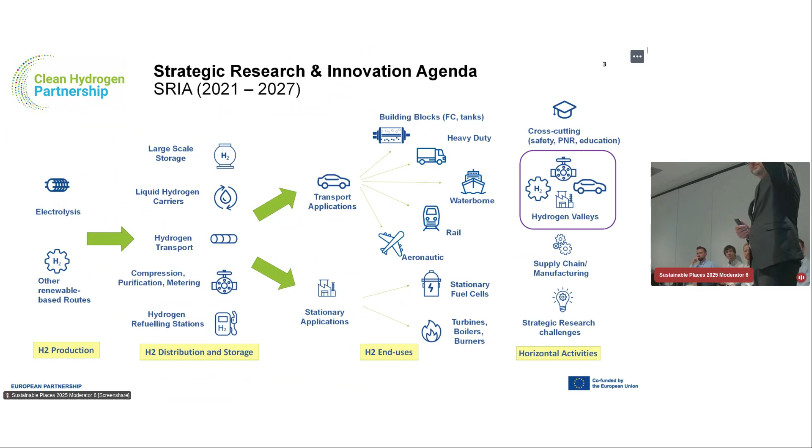What do we do? That's our mission. This is the third joint undertaking, and our purpose is to support the development and deployment of all the different components, pieces of the puzzle of the technology. So we're going from the production of hydrogen, the transport, storage of hydrogen, to all the different uses in transport or industry, and so on. On top of that, as you can see, recently we have added this additional box, which is the Hydrogen Valley, which was not something we were quite familiar with before.

So how did we get there? Well, it's the issue of the valley. It's something we've been working on for quite a while, since 2016 - we're talking now about 9 years ago. So as you can imagine, back in those days, the technology was still immature.

It was very expensive. The performance was not great. So the real life applications were somewhat limited. So a lot of our job working with the regions was about explaining to people how they could feature this technology into their local decarbonization plans. So it was a lot of explaining, working on early business cases, seeing the TCO,

how the technology could deliver. Time goes on, technology progressing, we start to see also some industrialization in Europe, and the Commission, the European Union, start to take notice of our technology. So this is not something for tomorrow anymore. This is something that can be featured in the European Union decarbonization plans and ambitions. So in 2020, you see we have the European Hydrogen Strategy.

Then in 2022, there was the REPowerEU communication. Probably heard about that one. This was about, when Russia invaded Ukraine, we realized that we are pretty much exposed when it comes to energy security. So there was an overhaul of our ambition. And as part of that, we also received 200 million as the joint undertaking, which are dedicated to the support of hydrogen valleys. So 1 billion is for hydrogen technologies in general, 200 million is dedicated to hydrogen valleys alone.

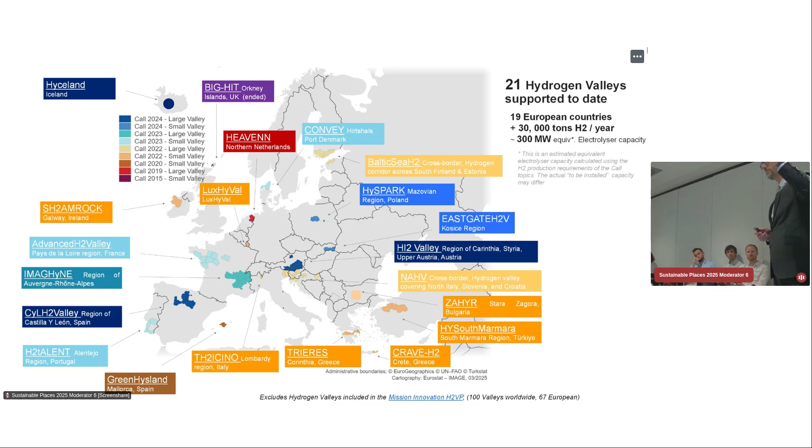The potential of all of these valleys, if you combine it, is 30,000 tons of hydrogen produced per year and around 300 megawatt of electrolyzer capacity deployed. And on top of that, there are tens of vehicles and HRS. Of course, I'm talking about potential. These are the grant agreements that we have signed. It's a relatively young portfolio of projects. We're still far from those numbers, right? But that's the ambition, that's where we are aiming at, and there's no reason to believe that we can't complete that or get very close to it.

Okay, so I'm getting the wrong button, there we go.

But getting there is not going to be easy, and we will hear probably about it even later. Again, it's a young portfolio, so even as a joint undertaking, we are still trying to get our head around it. But there are some common challenges that are starting to emerge that are clear. So the business case, it's not easy, especially now that when it comes to hydrogen, the industry is in a tough spot. And we are seeing increased cost of hydrogen, higher TCO, difficult for business models.

And also when it comes to mobility, for example, there is a lack of variety of vehicles that can be deployed. So sometimes we see there is a demand from a valley, but then there is not an industrial answer to that. That's linked to the second point. So there is a certain fragility of the suppliers, the end-use solutions. Of course, technical challenges. These are first of a kind type of projects.

So it's not anymore about deploying one piece of the puzzle, the electrolyzer, the HRS, the buses, and see how they work. This is about putting them all together. This is making them work in sync, right? And then there is also the issue of additional funds. We are publishing calls for small valleys, 9 million, and 20 million for the large ones. Well, it's a lot of money, but still it's peanuts.

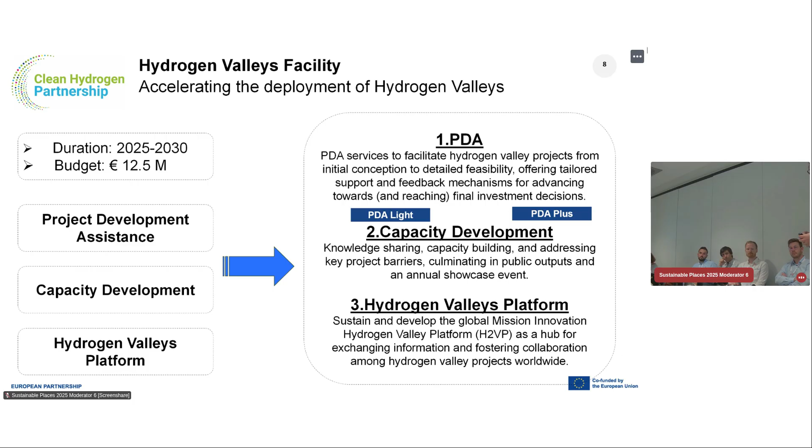Voila. And sorry, that was very fast, but 10 minutes. And it's just an overview of what we are doing there. All right? Thank you so much.

So thank you very much for this overview. It's really important to talk about the challenges, but it's even more important to talk about the progress made. That's why we are here today, to know more about these interesting projects. If we have very quick questions for Pietro, maybe we can ask now or we continue with the other presentations.

Okay, so we will start now with Guilherme Gaspar. So please welcome our speaker who will present H2tALENT, Alentejo Green Hydrogen Valley. Can I do the rest? It's yours.

So, good afternoon, everybody. I'm Guilherme Gaspar, lead researcher at Lab in Portugal. We are here representing a consortium of 29 partners in the H2tALENT project. It's a large consortium, which is always not easy to handle, but we have know-how there that will be very important for us to make it work.

So, a brief summary of this. The idea is to implement infrastructure in the Alentejo region. Alentejo is a very large region in the southern area of Portugal, where there is already a strong penetration of hydrogen, especially in the petrochemical industry. So the idea is that we take advantage of what exists already and try to build on top of that.

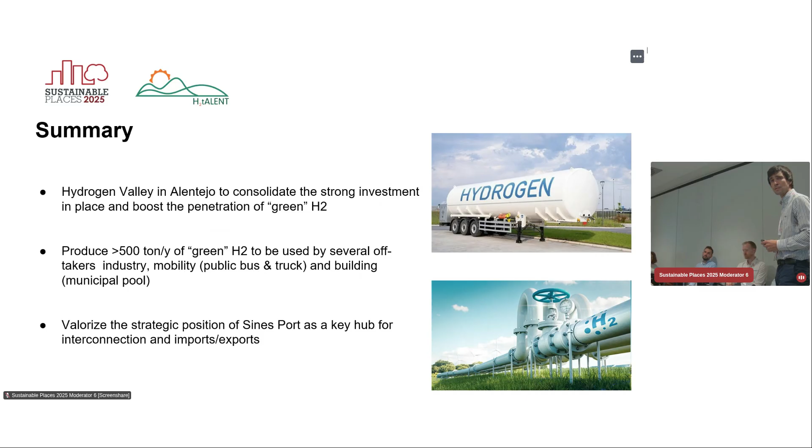It's a large consortium. We have Portugal, Spain, Luxembourg, Germany, UK, Brazil, and Morocco. So it spans not only across Europe, but also outside. So it's actually a very important asset by itself. We should be able to help others to develop, but we are also supporting our development on the Luxembourg Valley, present here. In the end, we are a consortium of 29 partners and 7 countries.

So this is basically the overview of the team. It spans from academia to industry and also municipalities, which are very important in this project as well. This valley is actually led by the University of Évora, which is also in the Alentejo region.

So this is basically the structure of the project. This is the map of continental Portugal. It's basically 4 locations. One in Sines, as I already mentioned, where you have the production. Then we have Évora and Alandroal as the end users, and we also have a third end user, which is actually more an energy community at the very south of Portugal. It's not in the Alentejo region, but when the project was submitted, we thought it could be a good asset to add because it's a very different asset for a valley. So it's basically a small valley, of course.

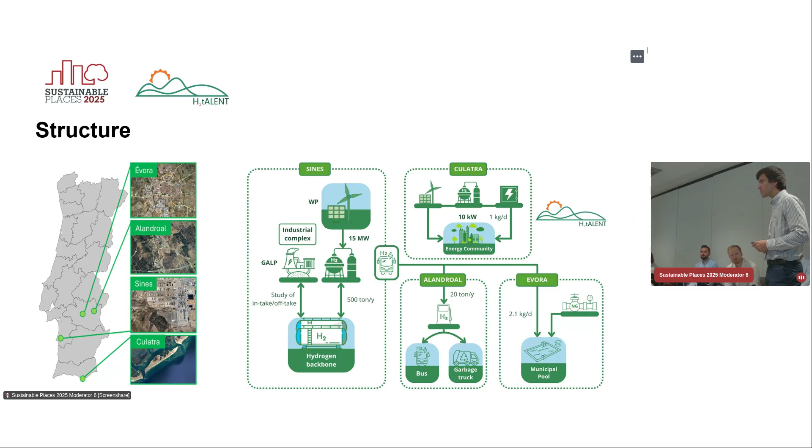On the right-hand side, we have Culatra island, working by itself with little interaction with the other assets. And then we have Alandroal with the mobility case study, where we have a bus and a garbage truck, which should be fed by 2 trailers from Sines, together with a municipality pool where we have a system for hot water to feed the municipality, especially in winter time. So this is basically our assets, which looks simple, but you will see in reality it's a bit more complicated than that.

So this is the structure of the project. The core of the project is based on work packages 3 and 4, where the assets should be developed. Work package 3 is the production and injection at the backbone in Sines, and work package 4 is more the end-use applications, from industry to buildings. Then you have all the other work packages supporting it, such as the creation of digital tools for management, upskilling and replication guidelines, and the other work packages dedicated to exploitation and project management.

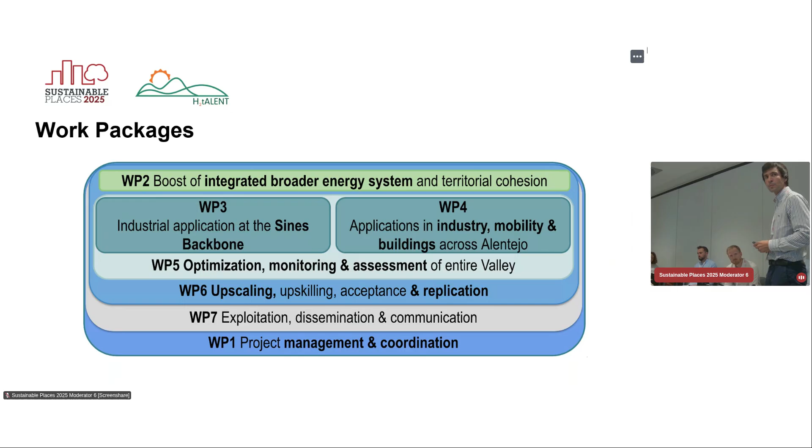In terms of progress, up to now we have delivered 11 deliverables, so about 30% already. 2 milestones achieved. I want to highlight milestone 2, which is the engineering design for the project. We have accomplished that. So we know what we want and we know what we are capable of, but we have some pending issues, which I will bring to you in the later slides. In terms of collaborations, we have robust communication among the partners. 29 partners is not easy to handle, but we are working on it.

So in terms of demonstrators, because I think that's what the core is about, we have the production of hydrogen in Sines as part of work package 3. It's an industrial area where we have land available, petrochemical and chemical industry, we have Galp, and we have Repsol Polymers there as well. So all of them need hydrogen.

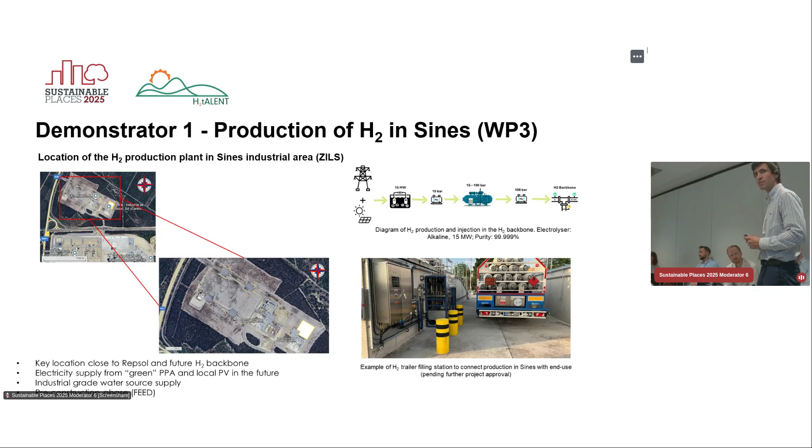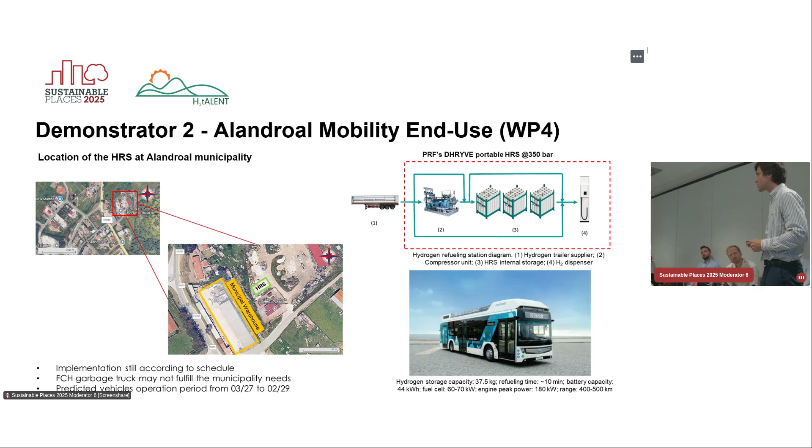In terms of mobility, we are targeting a fuel cell bus and a fuel cell waste collection truck. These will be the main assets. The other one will be a refueling station, built by PRF, a company dedicated to building these kinds of assets. They are partners in the project, so they will install it there. We already have an interesting place, close to a municipality warehouse, so this land belongs to the municipality, which is relatively easy to work with. We also have power supply at the scale we need, so this part is going relatively smoothly. We are starting the tender for the first bus to come.

In terms of the swimming pool at Évora, it's a bit trickier here, because at the beginning of the project we had a company called Fusion Fuel attempting to implement 1 megawatt at Évora, locally. The idea was also to develop a small-scale backbone there in Évora, which never happened. This means that the production of green hydrogen in Évora and the backbone never happened, and it won't happen in the next years.

So this means we have to sort it out in a different way. Together with the project officer, we tried something different: a local blending system to reach the target of 20% hydrogen in a blend with natural gas. The idea is that we get it from the local distributor, then redirect the pipeline towards this blending system with storage of hydrogen, and then bring it to the combustion system to work with the 20% hydrogen. But here there is a main concern: our local legislation doesn't cover hydrogen in public spaces.

What it does is provide a big umbrella to cover explosive and flammable gases, and that's it. This poses an issue when it comes to public areas, because you cannot control the number of people around. Most of them don't know there is hydrogen there, and we have a safety issue, which the municipality is also concerned about.

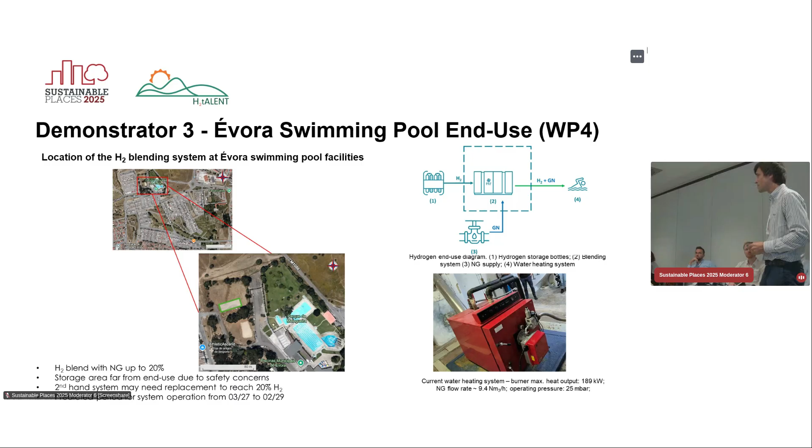So that's one of the other concerns we have there. I bring also the positive points, but also want to raise the challenges, because that's what's preventing this technology and this economy from growing.

Regarding Culatra Island, it was already an implemented energy community, so they have the stamp of energy community already. We are just adding a containerized system that produces hydrogen locally, and we can use a fuel cell there to power the local grid. It can be seen as an isolated grid, although there is connection to the national grid. So we are posing an extra system there that could bring an extra service to the local grid, and see what's the synergy between this hydrogen system and the local grid.

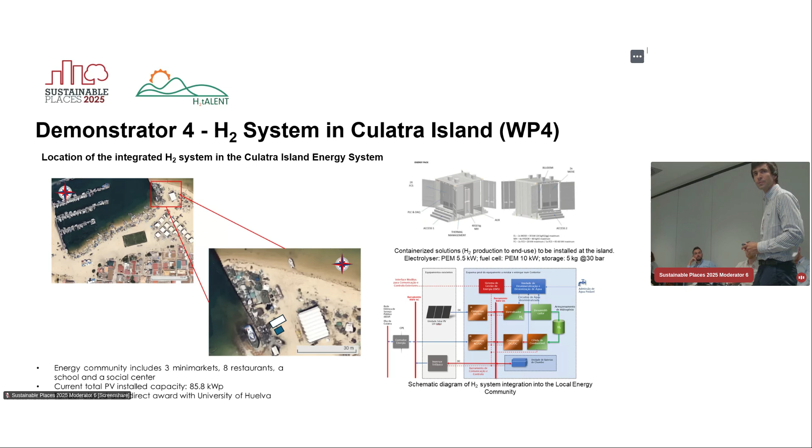They have a total PV capacity of about 86 kilowatt peak already, which is planned to extend. The tender is finished, so this one should go smooth and nice.

In terms of challenges and next steps, I already mentioned a few during my talk. The first one was the bankruptcy of Fusion Fuel, so they went bankrupt in the meanwhile. We had to replace them with a new producer in Sines, because it's not just about finding a hydrogen producer in Portugal, it has to be in the location where it was planned initially to make it work.

Fortunately, there was a company interested in this, Wind Power. They are responsible for the 15 megawatt implementation, but as I mentioned, we are pending on the national decision for this budget to come.

There were other projects attached to this H2 talent where the budget was from elsewhere, such as the backbone developed in Évora, which never happened. This led us to try a different solution, such as local blending of the system, which then poses extra issues regarding legislation. So it's not only one way, there is one issue after the other. On the way, we face several issues that we are kind of managing as we go.

As I said, local legislation does not cover hydrogen in public areas, so we have an issue there. And the wind power plant doesn't have an H2 trailer filler yet to link all the assets, so we have to look for complementary funding to cover this.

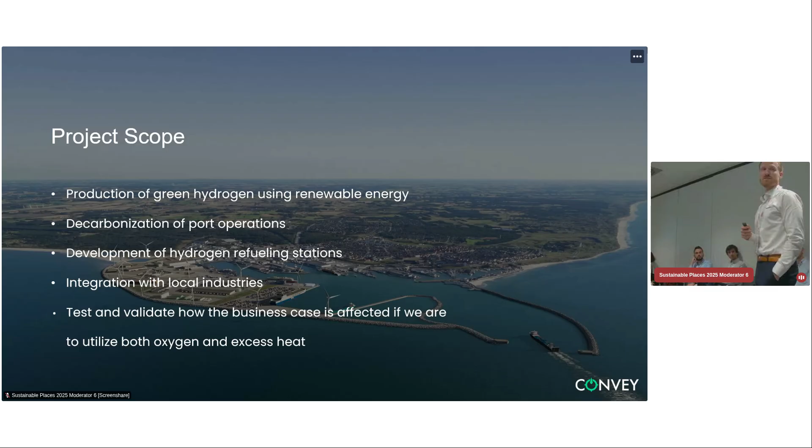Regarding the key milestones of the project and the timeline, we started back in March 2024, so we've been going on for a year and a half, just like H2 Talent. We are working on the system design at the moment. We've pushed this timeline forward a bit because we have some issues, not regarding the system design, but more regarding the business case, and also due to the way the application was written and the grant was permitted, which poses some problems for us now. But we are still confident we will secure the operation of the system, start construction by 2026, and secure the 2-year pilot period we are obliged for.

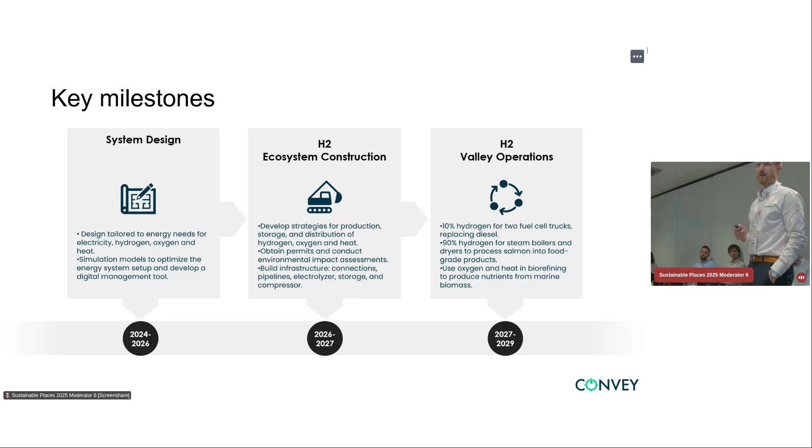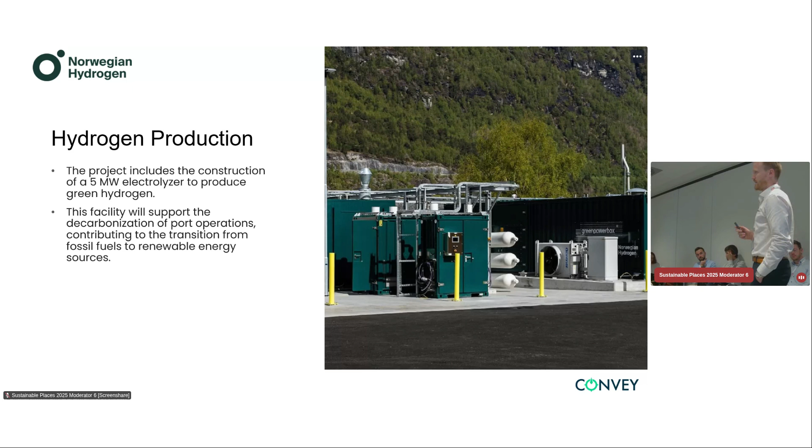Regarding the hydrogen production of the project, that is done by Norwegian Hydrogen. They're also the key partner in the project, and they're the one providing the external finance for the project. We're looking at a capacity around 5 to 6 megawatts for the electrolyzer, and we expect at least 500 tons of production per year.

Regarding off-takers, we have 2 different hubs. One of them is mobility. We have a joint consortium of Renewable Spedition, Transport Center, and Milan, where Renewable Spedition is a local logistics firm, so they will own and operate a few hydrogen fuel cell trucks. Milan will build and operate the refueling station at Transport Center, which is the reason we have this 3-part joint venture.

The oxygen from the production will go to Honest, a land-based aquaculture company. They are farming trout, so we'll have a direct pipeline from the electrolyzer up to this land-based fish farm, and they'll also be one of the off-takers of the excess heat. So a crucial two-part element of the project, and one of the tricky parts is developing different industries at the same time.

Biomega is the second off-taker of the hydrogen. They will have a direct pipeline from the electrolyzer into their burners, so we will substitute natural gas for hydrogen. They use it for steam production in their processing of fish cut-offs, making fish oils and proteins. So quite a versatile company, but they have a specialized system for this.

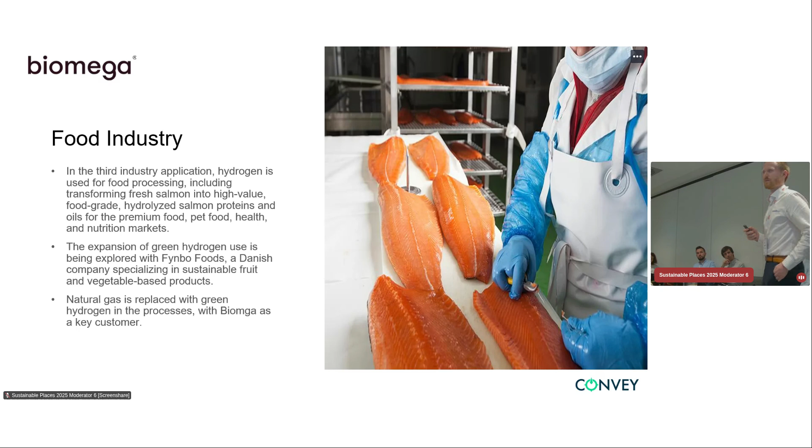Regarding the ecosystem, it's fairly simple, to be frank. Compared to the H2 Talent, we have a rather small ecosystem. We have a local energy supply at the port of Hirtshals, which is already established, so we'll connect to existing infrastructure. We're creating the energy management system, the data monitoring, and setting up the electrolyzer, and then securing the infrastructure needed for distributing the different products.

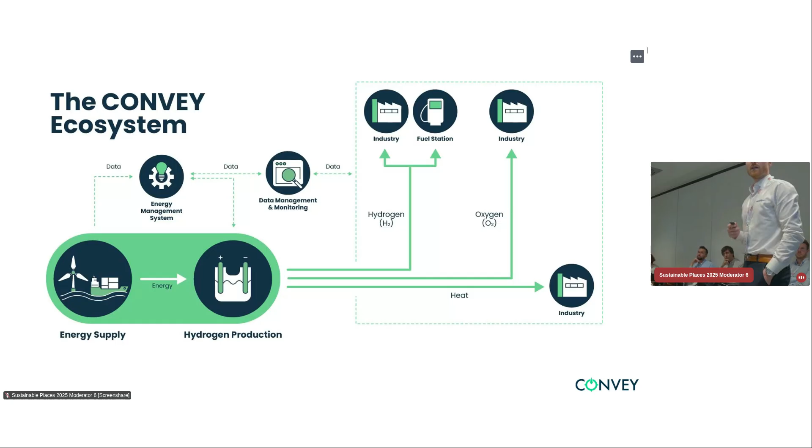This is what we sent in for the grant application. Here you can see the different partners - there'll be a better overview later on. It's a bit chaotic, I know, but it shows how the consortium works with renewable energy located at the port of Hirtshals, owned by the port of Hirtshals, going into the electrolyzer. Everything kind of goes on from there, and we utilize all byproducts from the electrolyzer - that's the key point of this project.

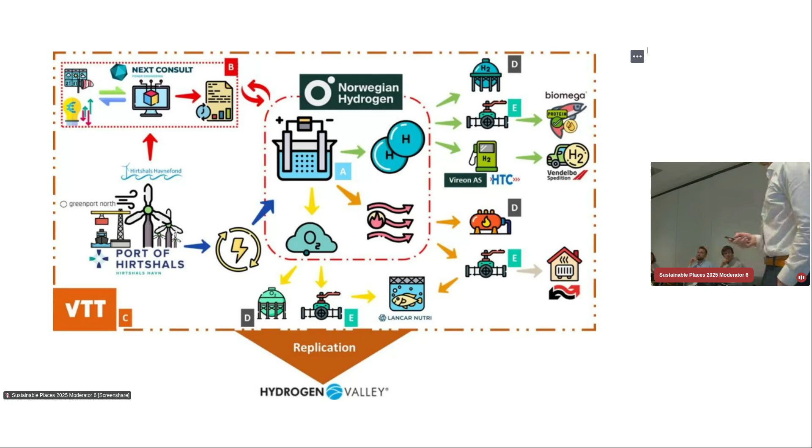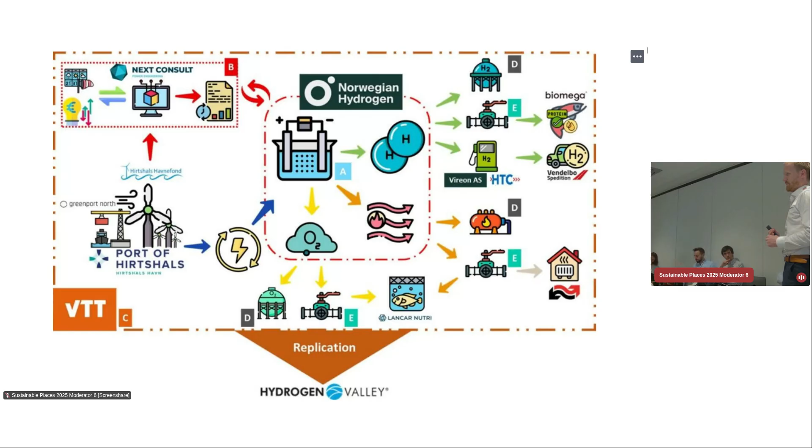Our role as Hydrogen Valley is kind of the dotted line around it all. We're in charge of the replication strategy, meaning we look over the shoulders of everyone in the consortium, assess what they're doing, evaluate it, and make guidelines for future hydrogen valleys, especially those based around ports. We're assessing which ports might be natural locations for hydrogen valleys in the future and which are not - we haven't seen any at the moment, but we're assessing that. We're also making a template for the checkpoints you assess when developing these hydrogen valleys, starting from the perspective of being a port.

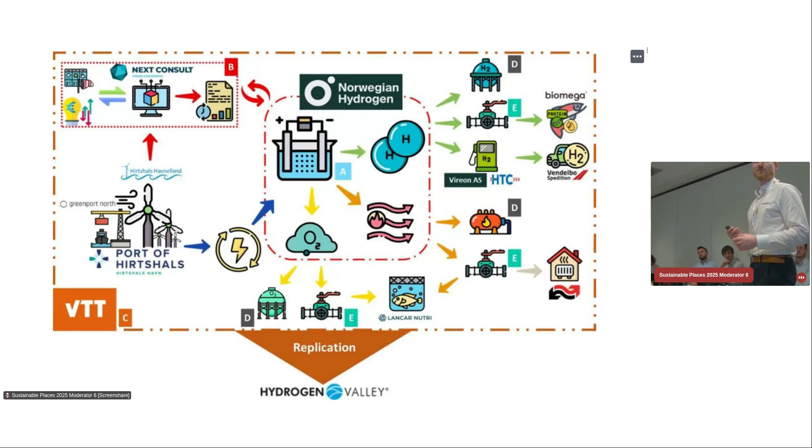So this is the actual valley, a picture of it. For reference, this is about 3 kilometers long from Hirtshals Transport Center down to the port. As you can see, currently there are 4 wind turbines located at the port of Hirtshals - you can't see the last one. We'll be connected to 2 of them by a direct line, but also connected to the grid. So the primary use of energy will come from the wind turbines, and we'll buy certificates from the grid if necessary.

Around 90% of the hydrogen will go to Biomega, we estimate, by pipeline. Of course we have a difference in price there, and that's one of the things we're assessing - the benefits, cost, and efficiency of transporting hydrogen by truck versus by pipeline. The pipeline will only go from the electrolyzer onto the local industry, Biomega. The rest will be stored in tube trailers at the production site and transported these 3 kilometers onto Hirtshals Transport Center, where it's repressured up to 900 bars for trucking.

I mentioned the oxygen pipeline as well - that will go to Onnest. Originally, when we made the application, they were to be located right here, and we thought it was a great idea to have a pipeline go there. Now they've moved location, and we're obliged to make this infrastructure, which poses some issues regarding the budget. As I mentioned, they're setting up a brand new land-based aquaculture right here - right now it's just a field. They're looking at a budget that's about 10 to 15 times bigger than our hydrogen valley, so for them they think it's peanuts, but we think it's an issue for the project. We're dealing with that.

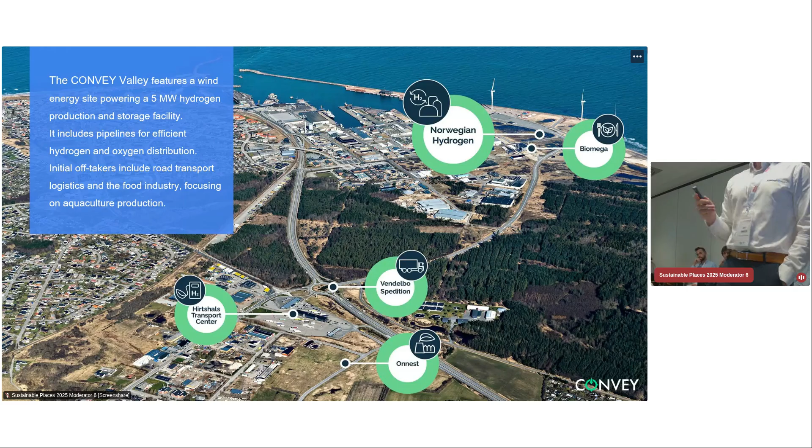Regarding the heat, it is to connect to the local district heating network. All of Hirtshals is connected to district heating, so that will be the offtake of the excess heat. In Denmark, district heating is very common in almost every city, so that is where we suppose all of the excess heat will go.

But as it is implemented already, the production of heating for the houses is already in place, and that poses a different kind of problem as we are to take over some contracts that are already in place. We'll see how that goes, but it's an issue we foresee in the future.

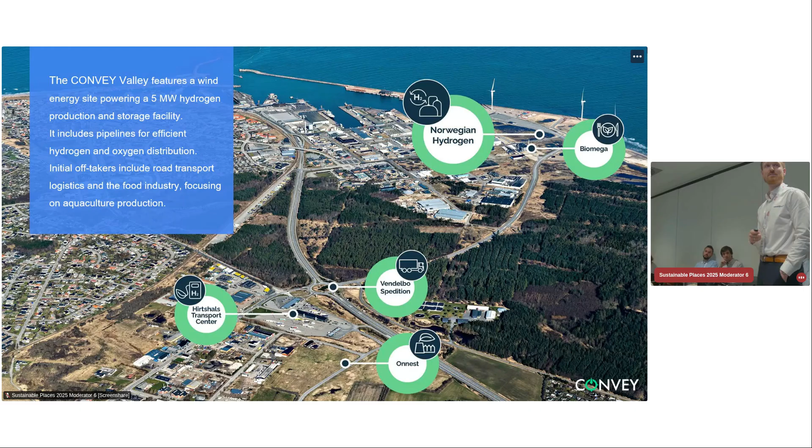One of our challenges is that we are obliged to deliver this oxygen. It narrows down the technology we can choose from regarding electrolyzers - one of the things we didn't think of when we made this application. So there are a number of things you might be able to look into, and some you'll have to go along with. But do your homework, prioritize your effort at the beginning of the project, even in the pre-project. The pre-studies are very, very valuable - prioritize those.

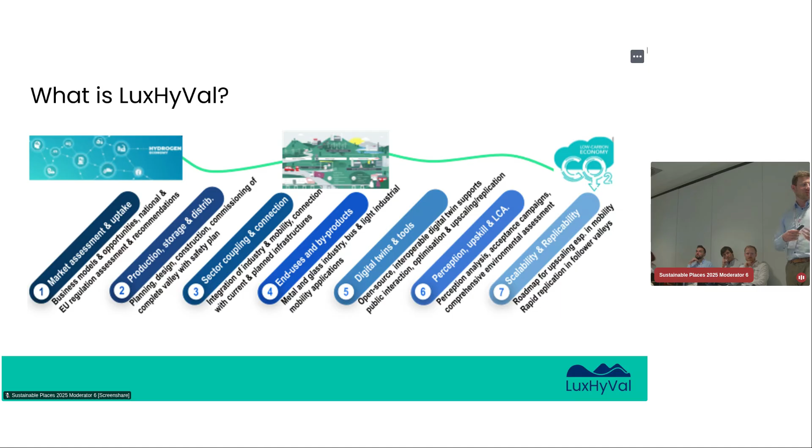For this project, replicability is a very strong point, to the extent that we have partners from Ukraine and the Czech Republic as part of the consortium from the beginning, to have them really deep in the project to transfer the knowledge out of the project to their respective projects in the future as soon and as smoothly as possible.

Like I said, we have 17 partners. Most of them are from Luxembourg, but we also have partners from Germany and France as the neighboring countries, spread across Europe. But the main partners naturally are from Luxembourg, and every partner has its own focus in terms of the work packages, as it should be in a project like this.

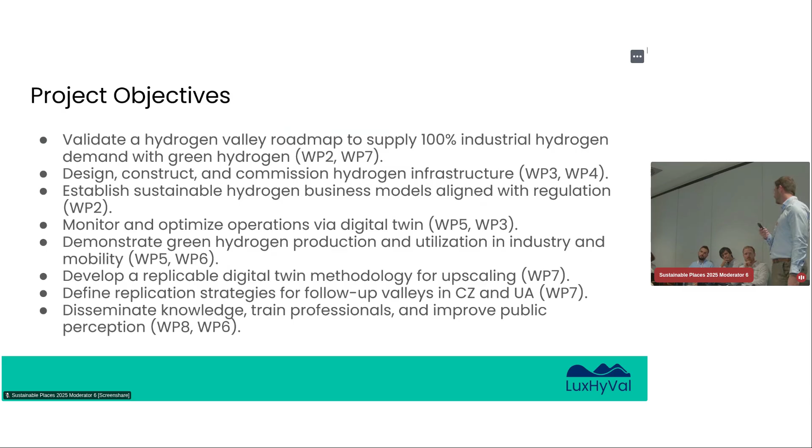And we have the different work packages. I don't need to go too much into detail on this because, like I said already multiple times, it is a very classical structure for a valley like this, with the one difference that we are really covering the whole value chain. Most valleys are already built up on something which is already present, or have partners which are already in the topic or in different parts of the topic, and we are really starting from zero in every work package we have here.

I don't know how many of you know Luxembourg, but Luxembourg is, I would say, the smallest real country in the European Union. It's not a microstate, it's a real country, even though it is very small, with just around 500,000 inhabitants. There is a hydrogen strategy already present, which aligns with the EU strategy. So this project is also in line with this, and that's also the reason why this project is funded on one side by the Clean Hydrogen Joint Undertaking, but also on a national level.

We are aiming for a production of 500 tons of hydrogen per year. In comparison with other projects, that's not that big, but it would be enough to satisfy 100% of the need for hydrogen which is present in Luxembourg right now. So it is really a significant amount, which will be split up so that more or less 2/3 goes to the industry, which is already consuming hydrogen, and 1/3 to mobility, which is a new sector. At least hydrogen mobility is a new sector which will develop inside of this project.

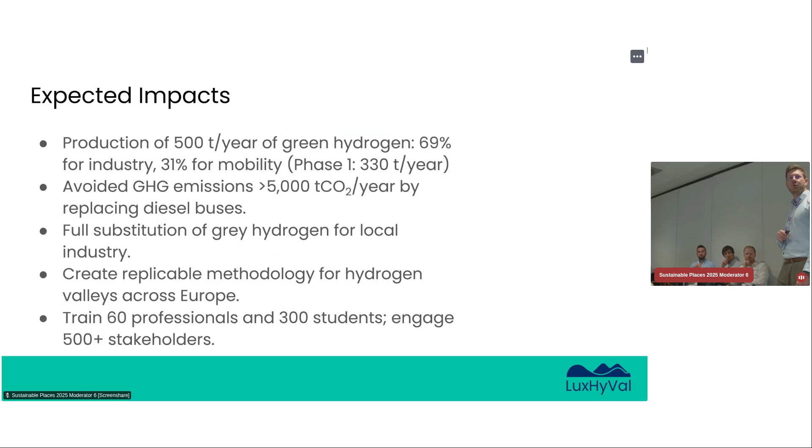Oh, it's the wrong direction again. Yes.

So we already started the project at the very end of 2023. It's already ongoing for more or less 2 years, and it has a split budget from the Hydrogen Joint Undertaking and national funding. But we are at a point where the project is not at a complete or full stop, but we are very much delayed by the situation that we don't have a final investment decision yet.

But there's a very good reason for this, and that's also what makes this valley probably a bit special compared to other valleys, if you take a closer look at who the key participants of the whole project are. If we're talking about production, we have two consortium members who are in the lead. Those two are the Encevo Group, which is Luxembourg's biggest energy company. It's not the only energy company in Luxembourg, but it's the biggest one. So it's not just a small energy company which sees a possibility to get additional market share by being the first one active in the hydrogen sector.

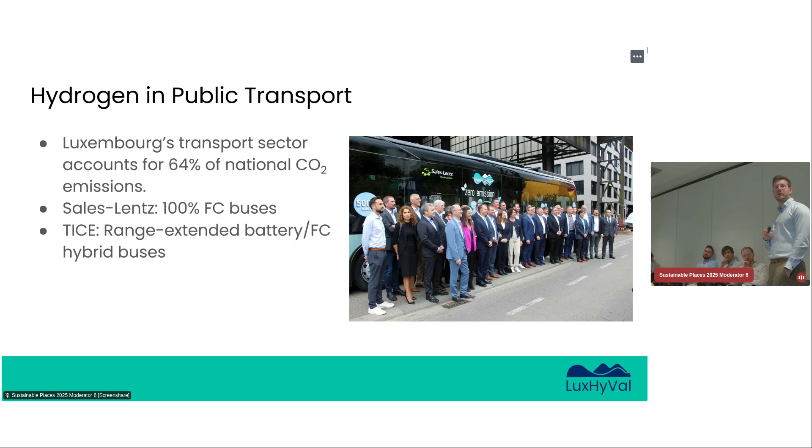And the same goes for the end consumer in public transport, where we have someone like Sales-Lentz, which is the second biggest public transport company in Luxembourg. Luxembourg is a bit special because public transport is free, so every bus route is via tender. So once again, we have someone here who is not there to gain additional market share by being first in the hydrogen sector, but someone who is already well established and here to be part of Luxembourg's first hydrogen valley.

And the same goes for the industrial application. Like I said, we have one off-taker of hydrogen in Luxembourg right now, which is the Ceratizit Group. Once again, it is a global player from a very small country. There's a very fun statistic: I think one of the main businesses is the little balls in the pens.

In the tip of the pens. I think 95% of all of these balls come from this company. So once again, global player. They don't need to gain additional market share inside of Luxembourg. They are already the biggest company in the sector from the beginning.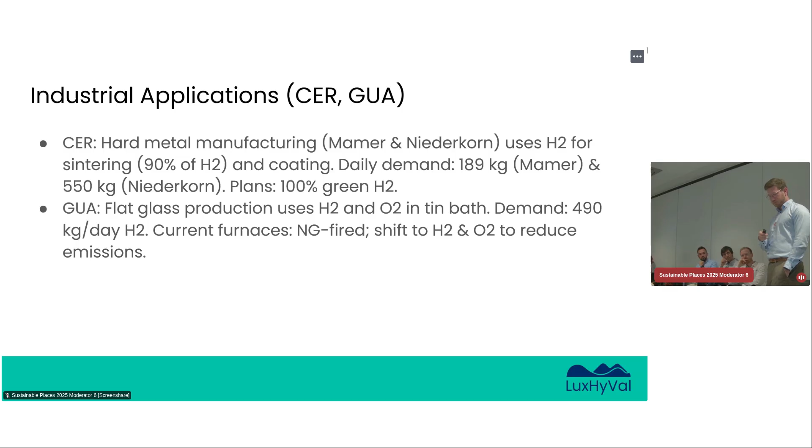And as you may have noticed, there was not so much detail about the technical implementation because, like I said, we are still in the phase pre-FID. And we are in the phase of pre-FID because, and I wanted to emphasize it a bit, this is not a project of companies who are very enthusiastic in the topic of hydrogen or companies who need to differentiate themselves from other companies because they are the first ones using hydrogen.

This is really a grown-up valley with grown-up companies taking part there who need a very, very robust business case in order to get the decision to invest in something like this. So in the end, what we have is a valley which has the chance, if it materializes, to be a very, very grown-up hydrogen valley right from the beginning, starting with the challenge and also at the same time the chance to start from zero to develop the whole hydrogen value chain in a small country, which is small but has a lot of opportunities for innovations like this.

So actually we work together in this project, but I take care of the social acceptance perception. And I can say that in this project it is a big part of the project, and I'm very happy to know more about how it will go in Luxembourg. And it's nice because it's quite a new project, but I'm sure that there will be a great future.

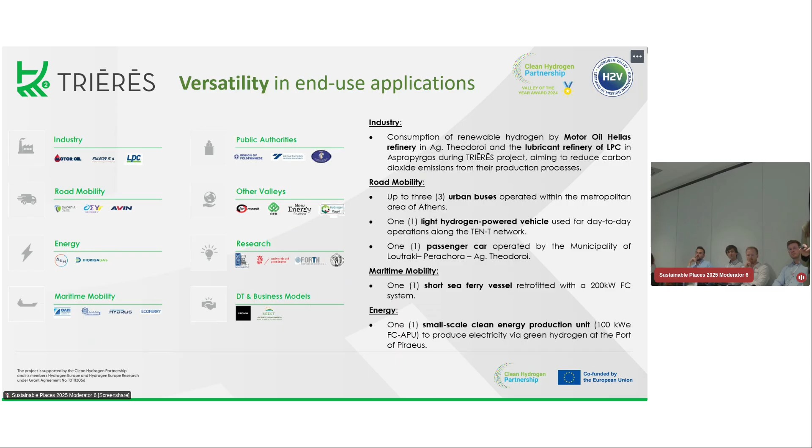This slide shows the entire value chain of hydrogen, summarizing the innovation developed within the EPHYRA project, also co-funded by Clean Hydrogen Partnership and coordinated by Motor Oil, upscaled by RRF funds, and how this production side is linked to the sister project TRIĒRĒS on supply and end use. In addition, the Valley forces the development of a digital twin to simulate valley operations, the creation of business models for application and scalability, and engagement with national authorities to enhance and harmonize the regulatory framework in line with European standards.

Regarding infrastructure development update, we have secured funding for the EPHYRA project, initially 30 megawatt, now being upscaled to 50 megawatt with additional works supported by Greece's RRF under the Green Hydrogen project. The 50 megawatt alkaline electrolyzer has reached a positive FID and detailed engineering and construction are underway.

Our first hydrogen refueling station is now operational at the Avin station in Agioi Theodori, co-funded by CEF Transport, and the second hydrogen refueling station is being prepared for tendering at the public bus depot in Attica for OSY. Feasibility studies are ongoing for a hydrogen-powered ferry, a hydrogen pipeline to Fulgor, and hydrogen use in lubricant production at LPC.

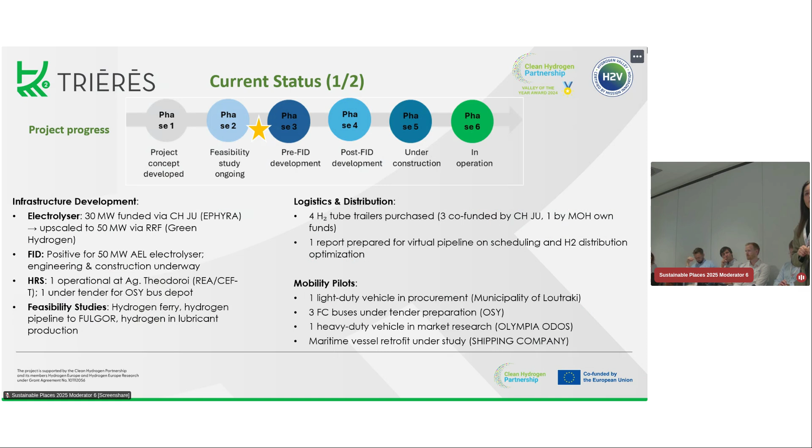For logistics, 4 hydrogen tube trailers have been acquired, and a report on virtual pipeline scheduling and hydrogen distribution optimization. In mobility, we are procuring 1 light-duty vehicle for municipality of Loutraki, preparing tenders for 3 fuel cell buses for OSY, conducting market research for a heavy-duty vehicle for Olympia Odos, and studying a maritime vessel retrofit with a shipping company.

Our work in energy and industry pilots is advancing steadily. Tender documents are being prepared for a 100 kilowatt fuel cell unit at the port of Piraeus, while the conversion of the LPC lubricants factory is progressing with the permit already submitted to the Greek ministry.

On the regulatory front, we are closely following the new hydrogen supply framework under national law and recently adopted a licensing regime for renewable hydrogen plants.

In R&D, we are developing a digital twin and continuing our scientific publications. The safety and supply dimension is also well underway with a preliminary safety framework for the Corinth Hydrogen Valley and HAZOP studies completed for the electrolyzer, tube trailers, and the first hydrogen refueling station.

We are strengthening collaboration and knowledge sharing through participation in international forums, study visits to leading hydrogen valleys, and events like the June 2024 regional workshop on hydrogen innovation. We also co-organized the third JIVE Roadshow across Greece and the Balkans, gaining valuable skills in hydrogen mobility and safety. Finally, in outreach and communication, our project website and social media channels are actively sharing our progress.

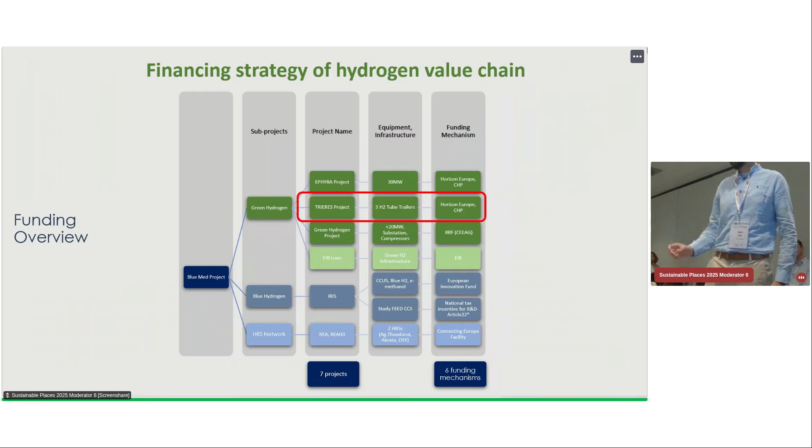Also, warm welcome from my side. I'm Philip Fish, CTO of GPSS, the same company as Patrick, who already presented the LuxHyVal project. This is, as Mariangela said, EcoWave, short for Energy Community for Hydrogen On-Site Production from Wind and Agrivoltaics for Industry Decarbonization. I'll stick with EcoWave, but you'll see in the next minutes why this title is as it is and what elements it contains. As we are the first Innovation Fund funded project in Luxembourg, one important thing is that you have to have innovation within the project.

Within EcoWave, there are actually 4 pillars which can be seen as very innovative for green hydrogen production. First, it's a first-of-a-kind project for green hydrogen production together with the LuxHyVal project, because, as Patrick emphasized, there is no hydrogen infrastructure already built in Luxembourg, at least no production yet. So these 2 projects are really demonstrator projects that will already receive national funding to be that. So yeah, we are first of a kind.

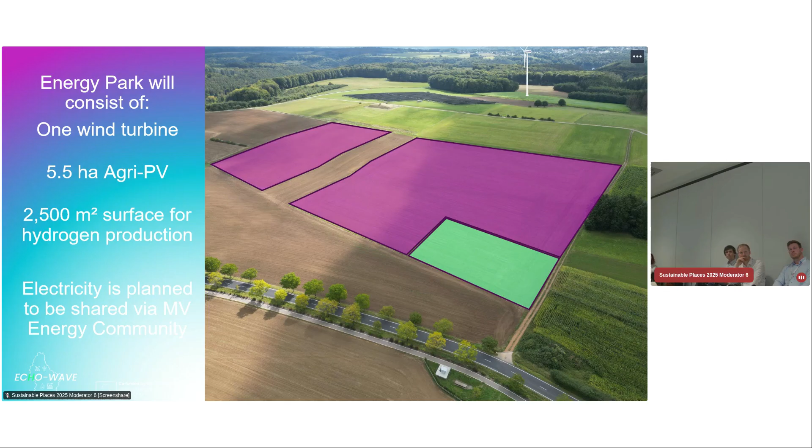And within EcoWave, this energy park will grow. We will build an additional agri-PV plant in these magenta colored surfaces, together with a hydrogen production facility of around 2,500 square meters in green. In the back, you see a wind turbine which will be built by our consortium partner, Soler, which is also a Luxembourgish company that almost operates and controls every wind turbine in the country. So the electricity will come from this new wind turbine together with the agri-PV, and be shared for hydrogen production directly on site.

The facts and figures show that this is really the core of the project: directly produced electricity will be used and stored as green hydrogen via a PEM electrolyzer. The wind turbine will have an installed capacity of 4.3 megawatts, the agri-PV 2 megawatts, both feeding the electrolyzer, which will have 2.5 megawatts capacity. So only about 15% will be surplus electricity, which will be injected into the grid. So it's not an isolated project - we have a grid connection, but we focus on relying on on-site renewable electricity.

This surplus electricity is planned to be shared within the municipality, also through this concept of an energy community. For the hydrogen, unfortunately, in the first phase there will not be an off-taker on site. There is a bus operating company very close by; they are also thinking of decarbonizing and purchasing hydrogen buses. So in the next phase, this will be an additional off-taker coming directly to the plant to fuel the buses. But in the first phase, it will be a transport of hydrogen: we compress it on site, fill it into trailers, and sell it to a gas distributor who will deploy it to industry and mobility in Luxembourg and the greater region.

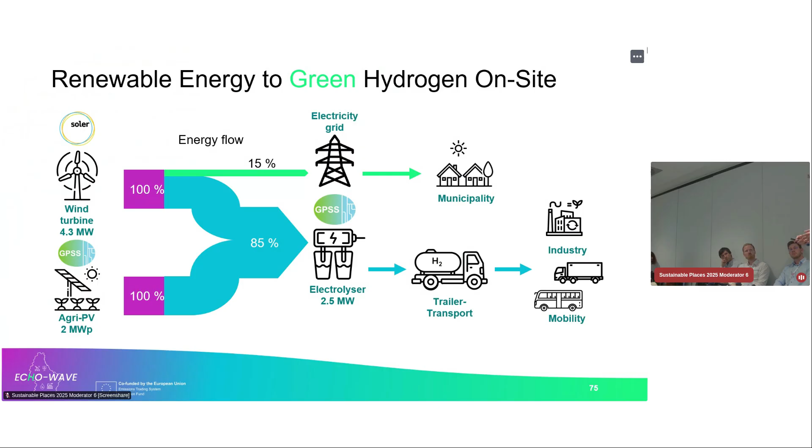The outcome of it will be from the on-site renewable energies, plus in the second phase a ramp up via a smaller portion of a PPA. So in the end, we are planning to produce around 2,900 tons of green hydrogen over 10 years of operation, which will then be used to decarbonize industry and mobility.

You see that it will be roughly around 23,500 tons of CO2 emissions which could be avoided by substituting fossil fuels and gray hydrogen. It is completely in line with what the EU supports and what the aim is also from the national hydrogen strategy, so that's also why we receive funding from both sides for the project. And it can cover more than 60% of the current hydrogen demand in Luxembourg.

The last pillar is what I already introduced: this intelligent control. Renewable energy, as we all know, is not always available, and this is also a challenge for hydrogen production. So what we develop are algorithms and parts of it that can forecast what is available in a certain time frame, talking about the supply of electricity, but also what the off-taker is able to take off from the hydrogen.

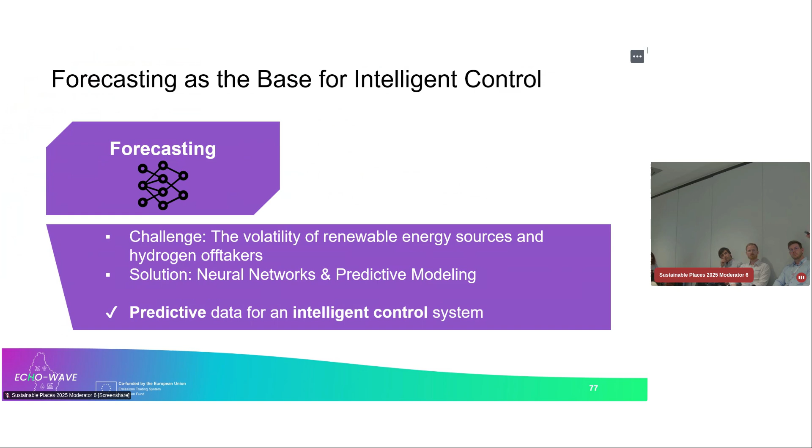Is the logistics company already on site? Is there an empty trailer available, or is my trailer almost full, so it does not make sense to run the electrolyzer at full capacity and shut it off very rapidly? So this is the forecasting part, and this is then used to implement an intelligent control based on model predictive control. So digital twins are also here a very important topic of the complete project and installation components, so that we can decide what makes sense.

I'll give you an example. If we see it's summer, we're producing full PV power, 2 megawatts, the electrolyzer is almost running at full load, and there is a field of clouds coming. You see that in the next 15 minutes it will drop harshly. So we can optimize the strategy and smoothly turn down the supply to the electrolyzer to prepare it for the drop in supply. But we can also start, because we have a little bit of batteries on site, to prepare it already that in the next 5 minutes there will again be an increase in supply, so to run it already, get it up, ramp up, so that we can produce hydrogen as quickly as possible again.

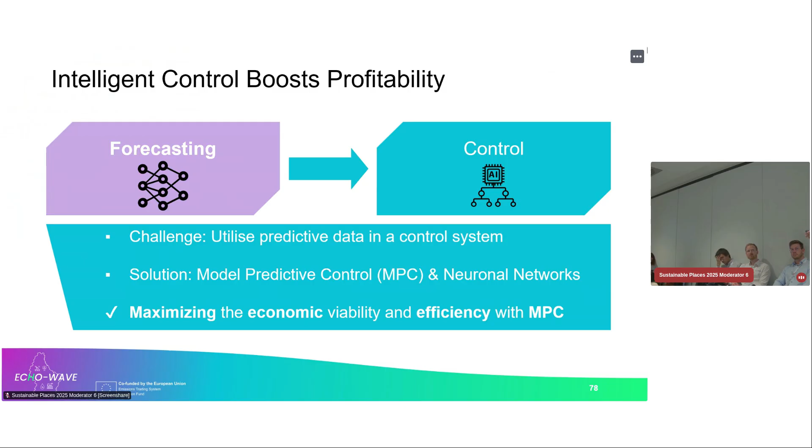Talking about the timeline, what you see here is the timeline of the Innovation Fund project. Of course, before the GA signature and before the official start, we already did feasibility studies and pre-technical studies to set everything up. Then in August this year, the ECHO-WAVE project launched, and we are going to have the financial close by the beginning of next year. So we are currently applying for all the permits and such, and we are quite confident still that we can achieve this timeline.

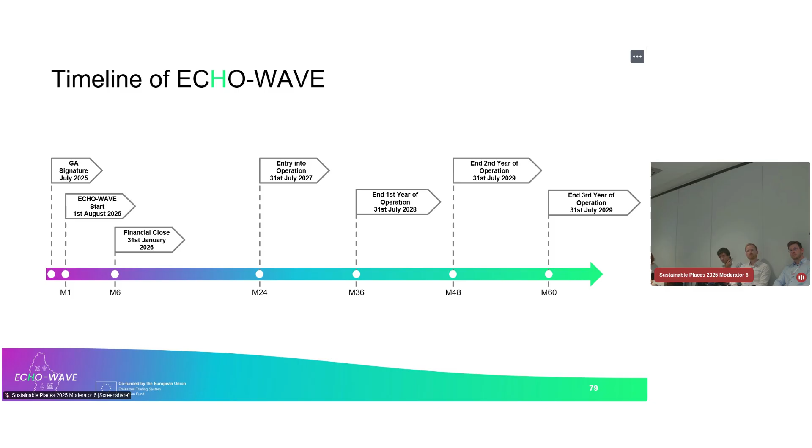Then there will be a build-up phase, installation of 1.5 years, 18 months. This means that by Q3 2027 the whole plant, because the wind turbine will also be installed, agri-PV and hydrogen, altogether will be commissioned and in operation by the middle of 2027. And then there will follow 3 years of operation, which will also be monitored within the Innovation Fund project.

Last but not least, I would like to show what such a local energy system can help with, and what the challenges were when we looked at the site. We had discussions with the local DSO. DSOs are most of the time, I think, not so very dynamic, more traditional and conventional. And as they evaluate such a project, they look at what grid capacity they still have available. The information they shared with us was 5 megawatts.

So what did that mean? Agri-PV 1 was already implemented, so even for an additional wind turbine, we did not get permission to do that without the ECHO-WAVE project, because within that we shared with them our simulations and already gained results, and they saw that the production profile of agri-PV and wind on this site were, speaking for itself, already very complementary.

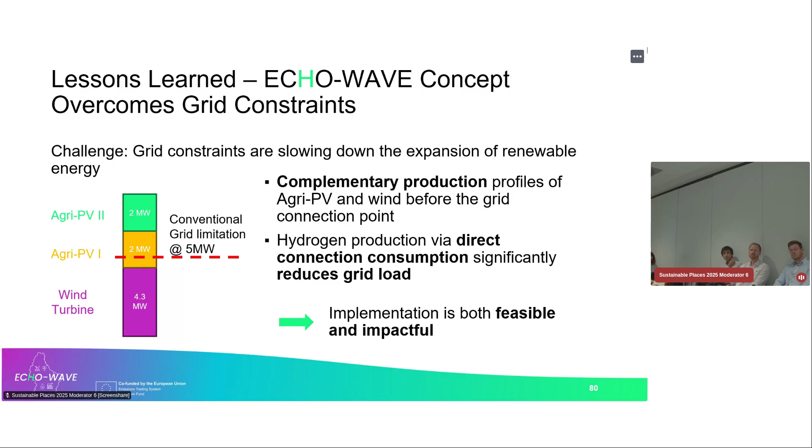So you see that this 5 megawatt limit was not so often stressed, even with the 2 megawatt. In total we have more than 8 megawatts installed to this connection point, and with the hydrogen production connected before the grid connection point, we showed that it really reduced the grid load and can even provide flexibility service to the DSO. They were very open to this discussion. They are not members of the project, but they are very supportive and see that it is feasible and impactful from the DSO side to have these kind of local energy communities where you produce green hydrogen as a storage medium for renewable electricity.

Sorry, if you want to give the closing remarks, what is the takeaway home? Yes, I will be brief. I don't think there is much to be added to the very good presentations. Just for a moment I had the feeling it was the coordinators anonymous meeting group, like I am trying to implement a hydrogen project for 18 months and it's not working. I'm sorry. As I said, it's not all doom and gloom. Indeed there are difficulties, there are not easy projects, but things are happening.

I think this is important. No, it will probably not be the valley that you imagined at the beginning, but each one of you has put down a number of recommendations. You are all operating in different ecosystems - the desert of Luxembourg, then in Portugal we already have a very rich use of hydrogen and you're trying to plug in, then you're in the harbor, then ECHO-WAVE is bringing new solutions that could be really useful for the valleys, I can see. And then we have also Greece. So indeed there is a variety of valleys with a lot of difficulties, and you're not shy in highlighting all of them, but also a lot of opportunities.